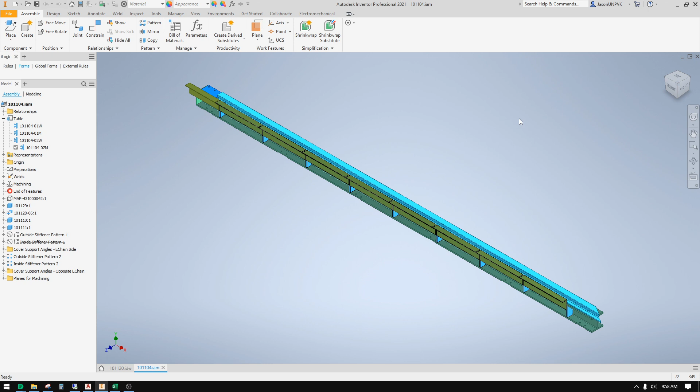Hello, I discovered I was wrong about having to use iAssembly in order to turn on or off the machining that is performed on a weldment. So I'm going to press Control N for new and start a new weldment. For this, I will place a couple of content center parts.

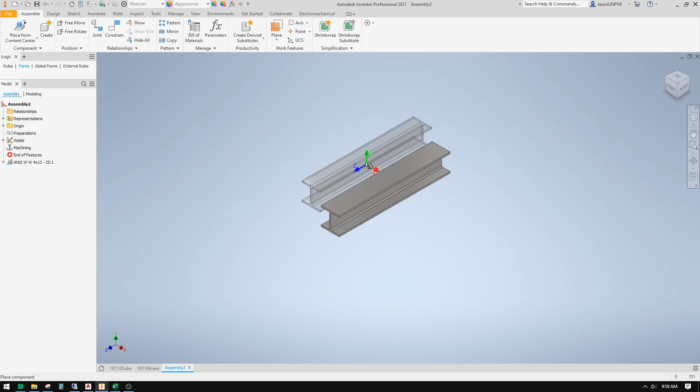There we go. Computer was a little frozen there. Okay.

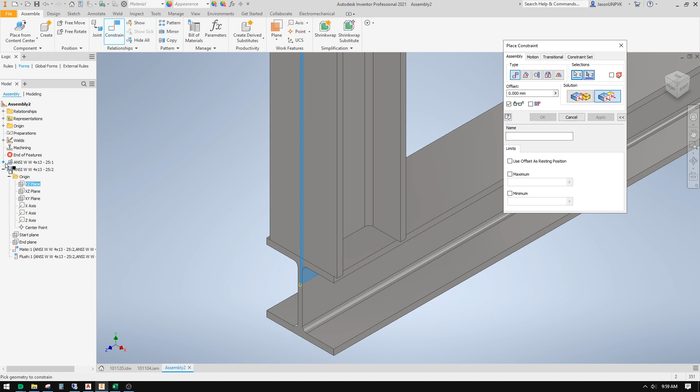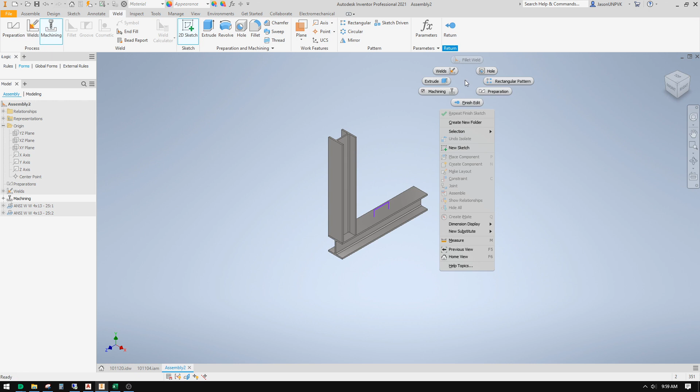Okay, here's a weldment. I will go into the machining environment, start a new sketch. I will notch the top of this beam. I'm not going to constrain that sketch. I would if this was an actual assembly. I'll go ahead and save this.

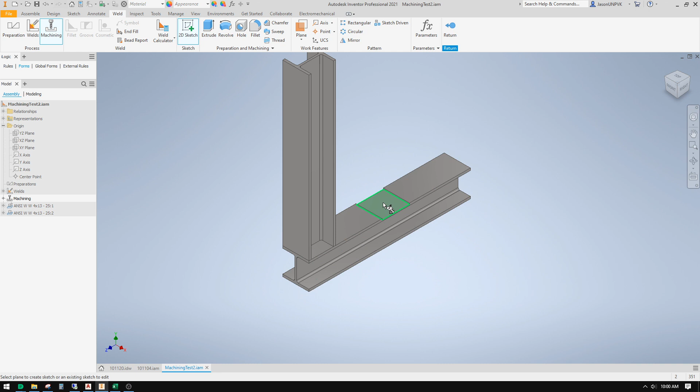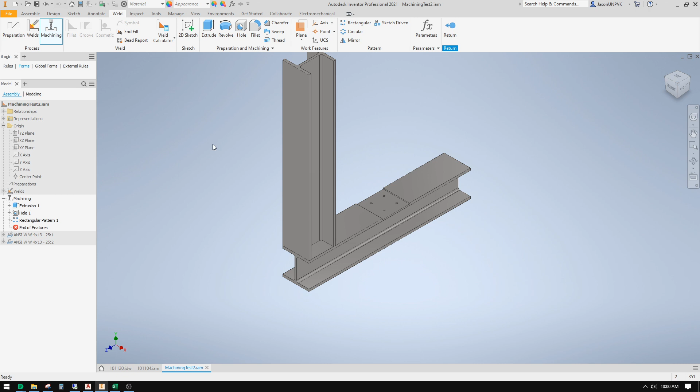I'll do one more feature inside of this notch. I guess technically this would be considered two. Okay. And I'll exit the machining environment.

So when we first started the project, of course, we wanted to show what this would look like at the welding table. And of course it wouldn't have this notch, it wouldn't have these holes. So I did mess around with representations to try to turn the machining on and off. That didn't work, and I was able to do it successfully with iAssembly. iAssemblies are still great, and I'm still using them, but you don't have to use them to turn off machining.

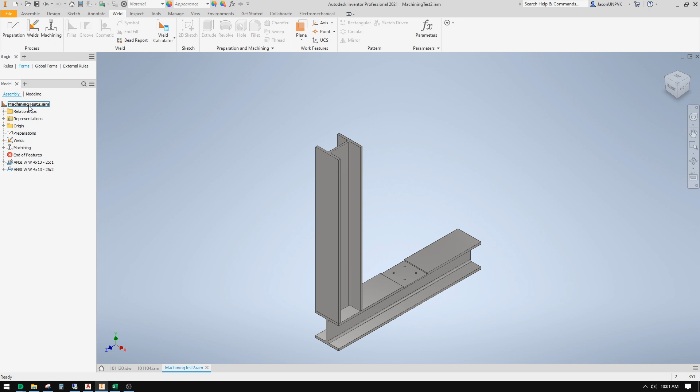It's much simpler. So I'm going to right click on my part number and create a drawing view, choose my template. I can use any of these views. Actually, I'll just go ahead and throw in the typical views. Okay. This isometric view might not update, but anyway.

So in order to turn off the machining, you double click on the parent view and go to the model state tab. Now I believe this only shows up in weldments. At the bottom left, you can see these radio buttons, and the radio button beside machining is checked, is on by default. So if I click on assembly and click OK, the machining is gone. It's even gone in the isometric view. I did not know that.

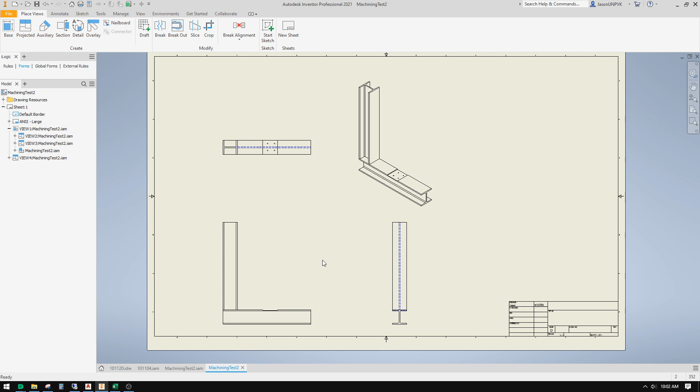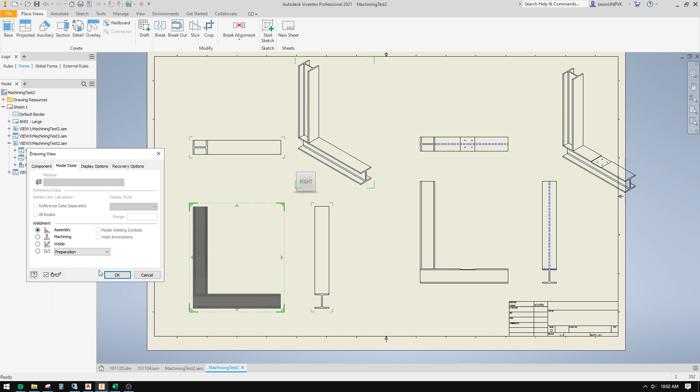So on another sheet, we've been putting the machining and the welding on two different sheets. But I'll just do this on the same sheet, just for demonstration. I think you already get the point. But anyway, on this view over here, I can click on assembly, and here I have the same assembly, but I'm able to show the machining and the welding.

Just that simple. So I apologize about that. I did not know that, and I stumbled upon it. In fact, I think if you double click on this view and go to model state, the way that you choose a different member of your iAssembly factory family is by going to this drop down menu, and I believe I was changing the family member when I noticed this.